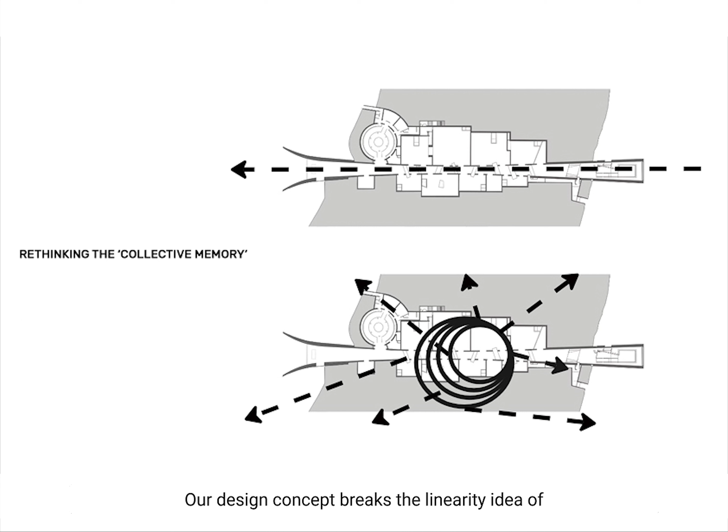Global Narratives is a design for a Holocaust museum in the city of Montreal, Canada. Our design concept breaks the linearity of the Holocaust Museum in Jerusalem, which leads the visitor through a local narrative, in order to connect the building to its place and to more global meanings for the Holocaust events.

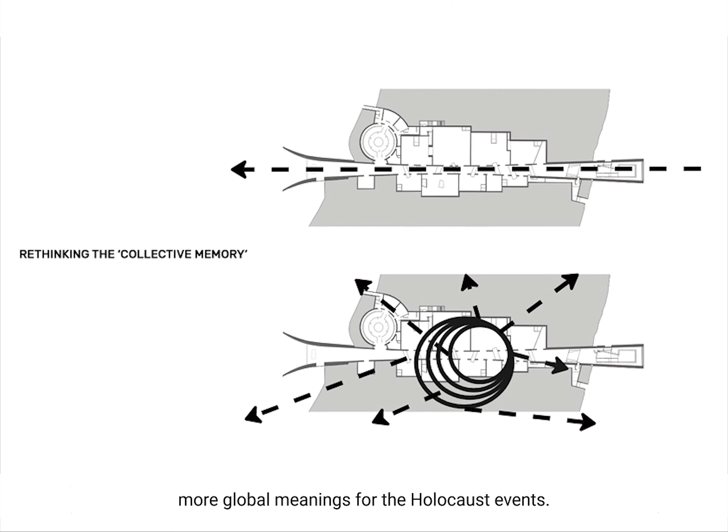Montreal is an island surrounded by water, and St. Laurent Street, where the museum is located, spills into the river. Therefore, water has been taken as part of the building experience. Water has multiple meanings, both in Judaism and philosophy, as a representation of life and death. We choose to implement water experiences in 3 different elements of the structure.

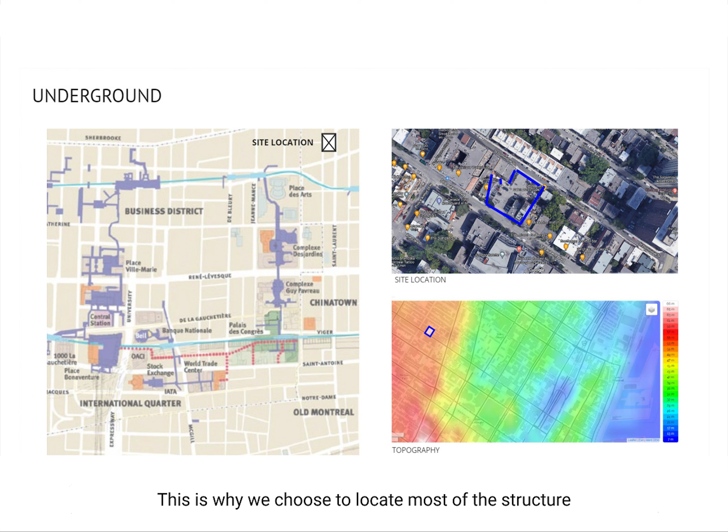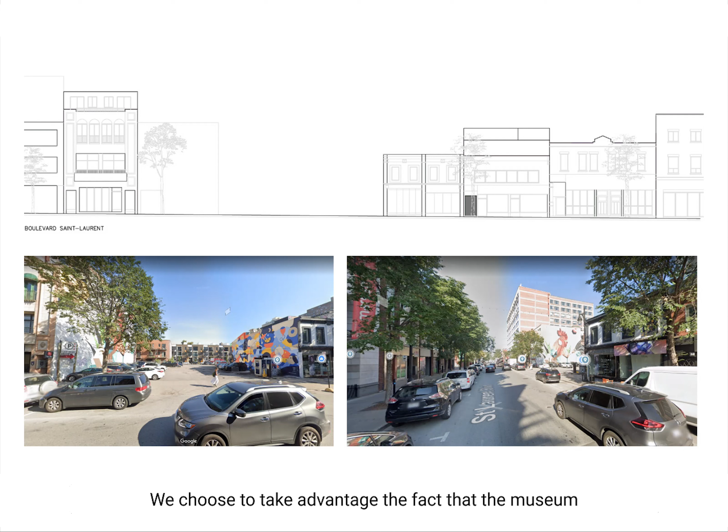Near the site location, Montreal's underground city exists. This is why we choose to locate most of the structure underground as well, and connect it to the city. In the conceptual model, we expressed our intention to create a lively museum between 2 surfaces, top and bottom. We choose to take advantage of the fact that the museum has 2 fronts, and use it as an opportunity to link the building to more places in the city.

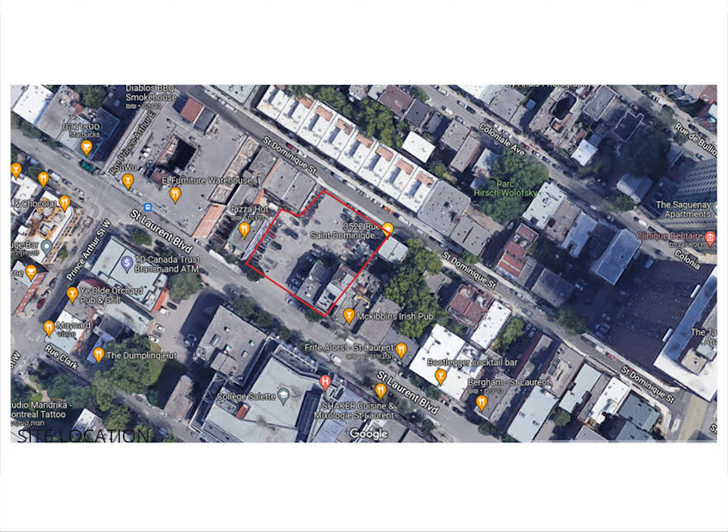The St. Laurent front is the main entrance to the museum and has access to the public space on the roof of the building. The St. Dominique front is the entrance for the museum's daily workers, which reveals the possibility to use the structure's roof. The museum utilizes the entire area of the lot, while the structure is mostly underground, to keep the facades minimal and modest in terms of presence.

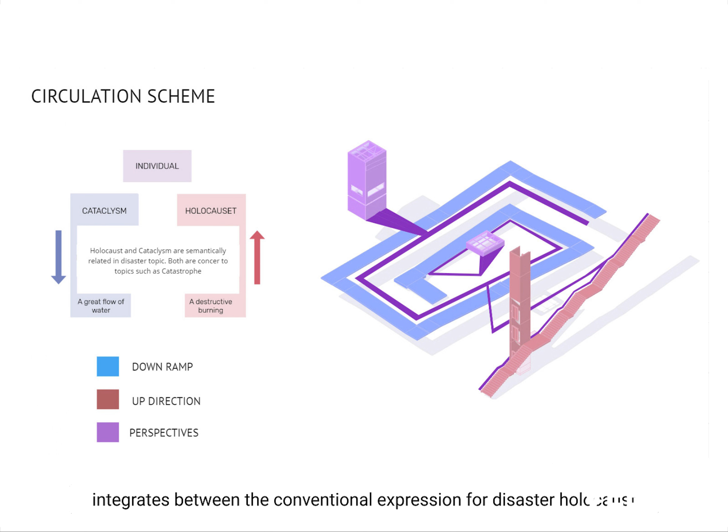The circulation scheme of the building integrates between the conventional expression for disaster, Holocaust, and the more global term, cataclysm. Finally, the building combines the circulation scheme with water experiences: a downward entrance, like diving, that disconnects visitors from daily life; a falling water that is present throughout the visit and represents the catastrophic event; and the water hole, which is the final meditative agora, as an infinite space.

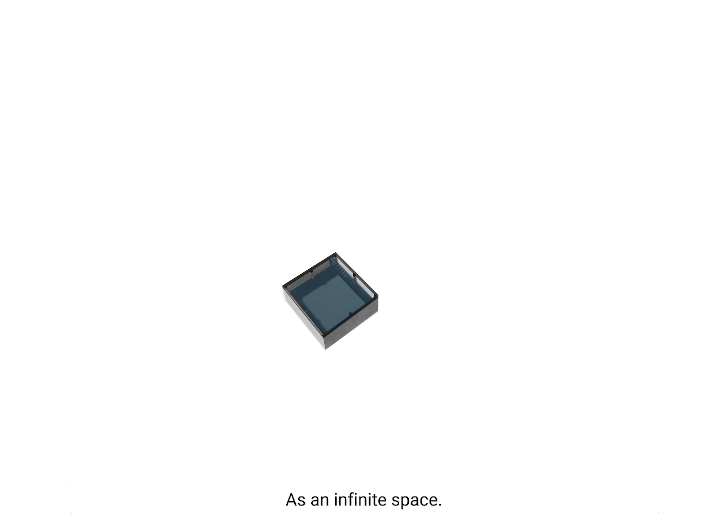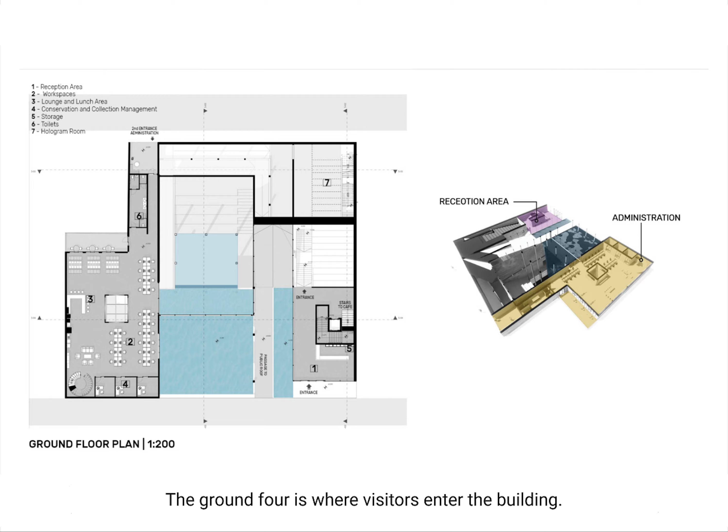The ground floor is where visitors enter the building. While entering, the visitor crosses a water pond that at first sight seems stable and quiet. From that point, the visitor chooses whether to go up to the public roof, or to enter the museum.

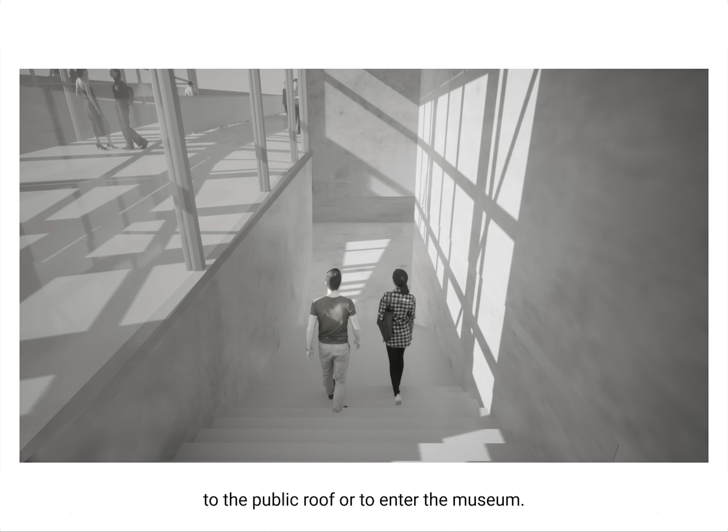The left part is the administration area, accessible from the front of St. Dominique Street. On the first floor, the museum's cafe and a gallery floor for the museum's administration are located. These 2 parts are connected by a bridge for the benefit of the museum staff only.

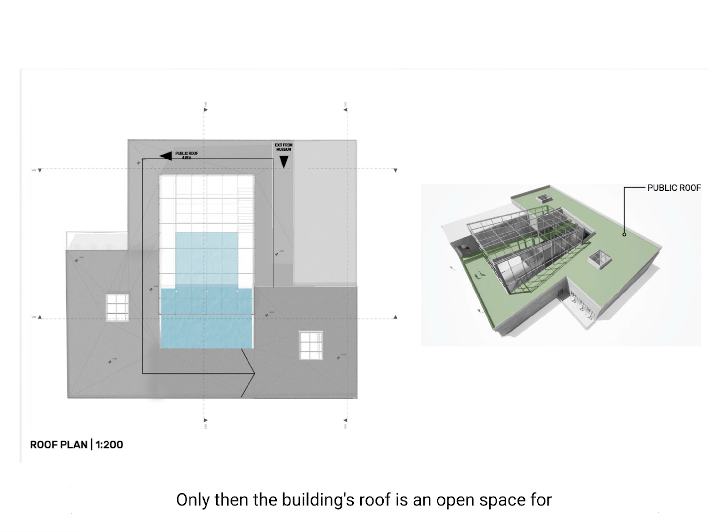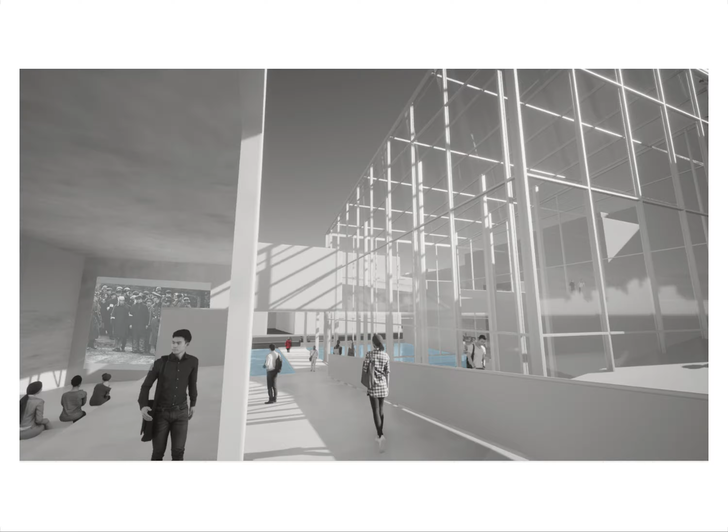The building's roof is an open space for the public, designed as a huge ramp. It can be reached from the ground floor, while at the beginning of the ramp, the exit point from the museum is located. On the rooftop there are windows that expose the museum's inside to the public on one hand, and bring light into the underground spaces on the other hand.

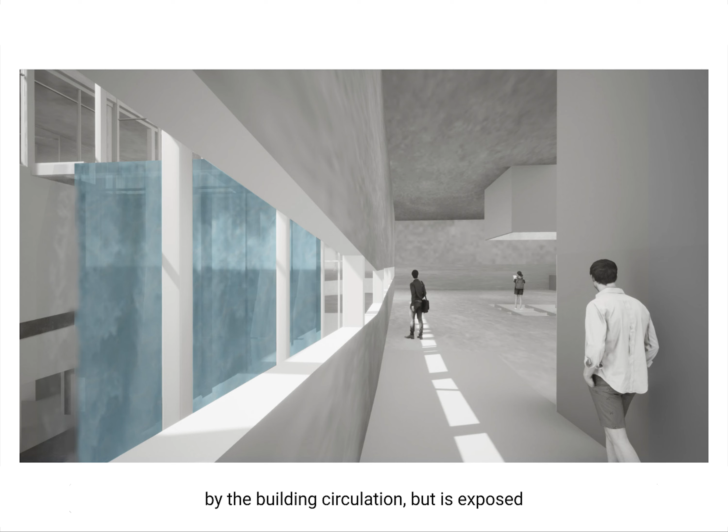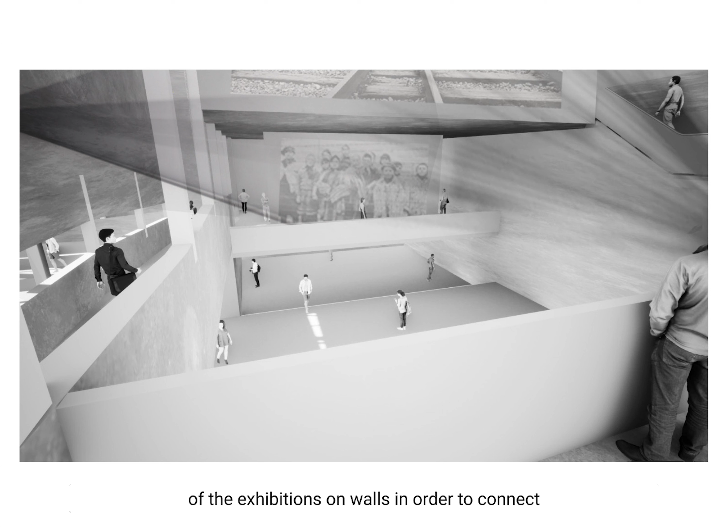In the underground floors, a variety of exhibition spaces are located. During the wandering, the visitor is led by the building's circulation, but is exposed by perspectives to other spaces. The idea was to create an experience of independent exploration, while the waterfall is a point of orientation, to not get lost. Taking advantage of the fact that the lowest exhibitions are also the darkest, we choose to project some of the exhibitions on walls, in order to connect history and technology, past and future.

The last floor is the lowest point, where the water hole and the agora space exist. This space is a self-reflection place, designed as a mirror of itself from the 2 sides of the waterfall. The final space is on one hand intense, because of the waterfall sound, but on the other hand meditative, helping with processing the visit. After having a significant experience, the visitor will get back to his daily life, acknowledging that indeed life goes on.